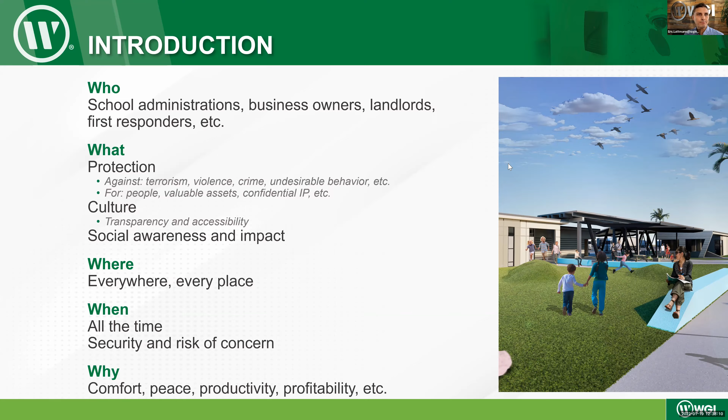CPTED is an abbreviation for crime prevention through environmental design. This is a concept that has been around since the early 70s. It's a multidisciplinary approach. As architects, we are collaborating with all kinds of different engineers, planners, landscape architects, stakeholders, users, and clients, coming together in a cohesive fashion to focus on what design decisions we make to deter criminal behavior and improve the quality of life.

It really belongs with the power of the people. I'll get into active versus passive strategies, but the people in the space are really what drives how a space will respond and react to the use.

And it must be integral. We have to start planning for safety and security well early in the process. This is not something you can add in later and assume the strategies and concepts are going to work as if you had integrated it at the beginning, thinking about it in the initial kickoff meeting, and planning with your users and stakeholders what strategies could be implemented to make for a successful project in the end.

There's this first generation of CPTED, which was derived out of a document created for the US Housing Department by Oscar Newman called Creating Defensible Space. This discussed design strategies for architects, engineers, and planners to identify spaces, look at concerns, and attempt to remediate those through design decisions.

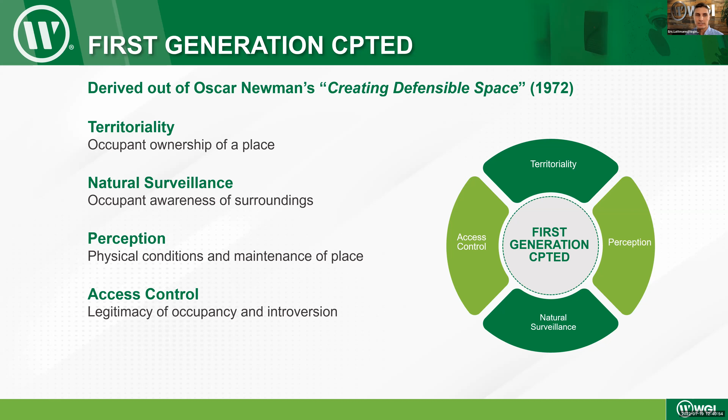When we get into the second generation of CPTED, this starts to talk about social awareness and how we're trying to create solidarity between us socially. We as users or occupants of a facility, whether it's a park, a government building, or a school, are working together and looking to solve localized problems.

This is like a neighborhood watch. We are working as a community, all looking to work together and build camaraderie. The idea of social awareness was an expansion on that awareness—that we can all be aware together and utilize our behaviors to really impact how a place will work.

Diversity is a notion of bringing demographic diversity and capacity of use. For example, in a particular plan for a city, maybe there are lower percentages of alcohol-serving establishments. It's a way to create a balance of types of uses to bring diverse backgrounds and diverse people together, achieving the solidarity that the second generation is looking for.

Connectivity is about always looking to link occupants through transparency and inclusivity. This is the extroverted, preferred way we have developed in our industry of wanting to accept and be open to all of these different ideas and people coming together.

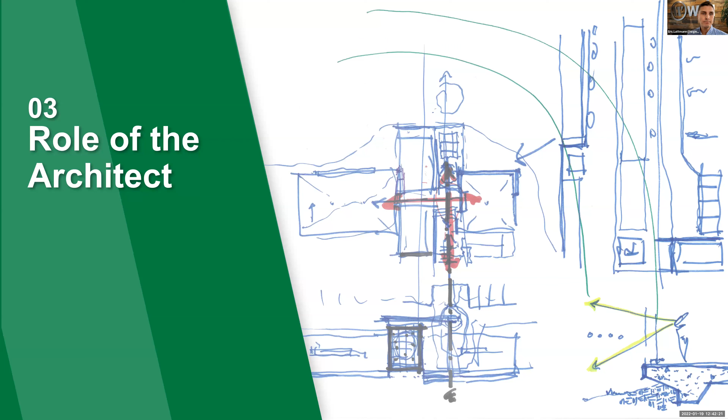What is my role as an architect? I'm trained to be the collaborator—the one managing most design projects, using our resources and engineers and planners to collaborate and harmonize our ideas.

We're looking to think outside the box and creatively about how we implement solutions that are cohesive. Not every problem is complex, but we do work on complex problems a lot. What we do is provide solutions to those problems, and safety and security is one of those integral solutions.

As we look at full holistic designs, we're talking about everything from engineered systems through safety and security and even into aesthetics. The idea is that we balance all of this in a way where a project feels, looks, acts, and is comfortable for occupants and users. A lot of things we don't necessarily want to see, like safety and security, can be balanced and almost disguised so it blends and fits with the facility and does not appear as if you're walking into a fortress.

The integrated design process is not a concept that I've derived. It is something I use as a basis for how I work. It's an idea of bringing all these ideas together and providing a cohesive solution. We must bring balance—that balance is of all those items I listed beforehand, and even more.

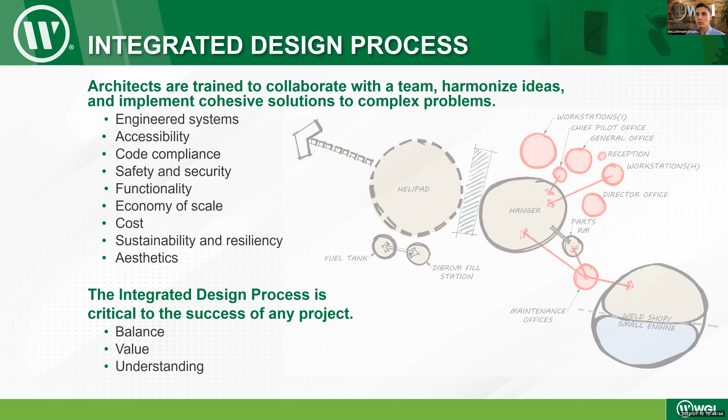We have to understand what the goals are. That's why as architects, we strive to meet with our client regularly, have charrette sessions where we can look at the design holistically and even utilize everyone's ideas in the final solution, understanding what kind of people and place we are designing for that particular solution.

Safety and security is not an afterthought by any stretch of the imagination. As an architect, as defined by the Florida Department of Business and Professional Regulation and nationally through the AIA, I have a general responsibility—I'm looking at the profession with the general health, safety, and welfare of the public for which I'm designing these projects. So it's already inherent to what I do on a daily basis.

But this is something not a lot of people think of at the beginning of a project, because a lot of times it's more or less just adding cameras or access control key cards or bollards, something to protect the facility as just a general requirement, and not thinking about it holistically.

What I wanted to get out of this is that this takes place at the charrette, the design kickoff, at the very beginning. Then we go through the process of anything from hand sketching to creating models to the final built solution. It's always there in the forefront as a thought, and it's implemented appropriately that way.

So I've provided a couple of links. I think it would be beneficial for anybody that has an interest in safety and security. This website can expand into many other areas, but these are a couple of specific links that I think would be integral to what we are talking about today.

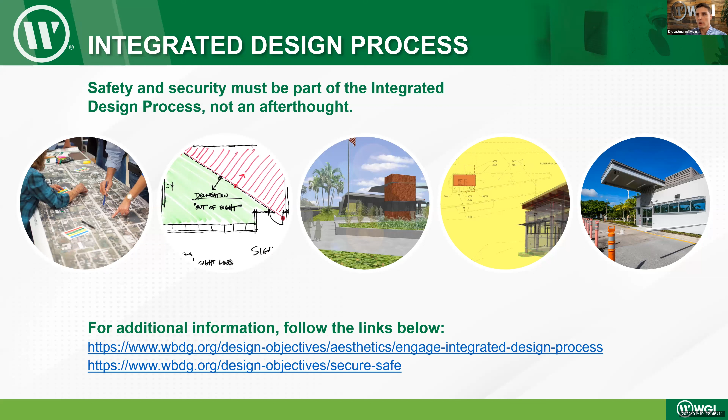As I mentioned, it's not one size fits all. You can't just apply cameras and access cards to every project and assume you're implementing safety and security strategies, because that's not the case.

I've taken on this as a passion, and I've written a couple of blog posts and white papers about this. Happy to be presenting in this kind of format, because I do think it is an important part of the puzzle—something that must be integrated early. We know that not every project will have the same level of this implemented into it, so what we can do is also a threat and risk analysis.

Should it be an existing project or an existing facility that needs to be reviewed for areas of concern where you could have a little more security for your particular facility, and understanding how the goals of that project work with that analysis.

And this is for both new and existing projects. So every single project, doesn't matter if we're designing a lobby renovation implementing security upgrades, or a brand new school building designing it from the ground up, as a design team we all need to be on the same page and think collaboratively.

We know that it's iterative, which means we will be constantly tweaking and collaborating, not just internally within our design team as a silo, but with the users and the client, any stakeholder that would have an invested interest in that particular project. We'd want them included, and we need to be approachable.

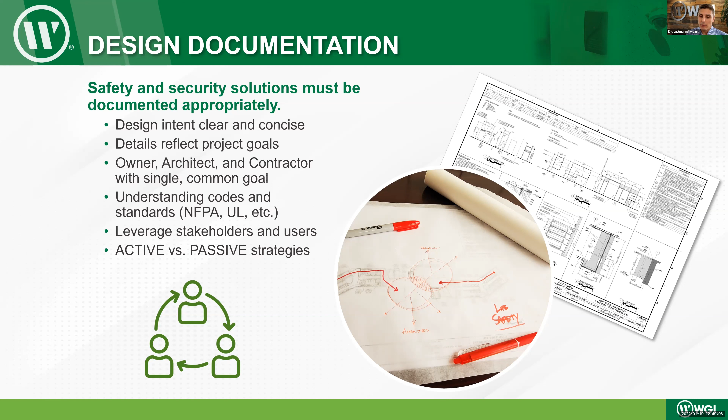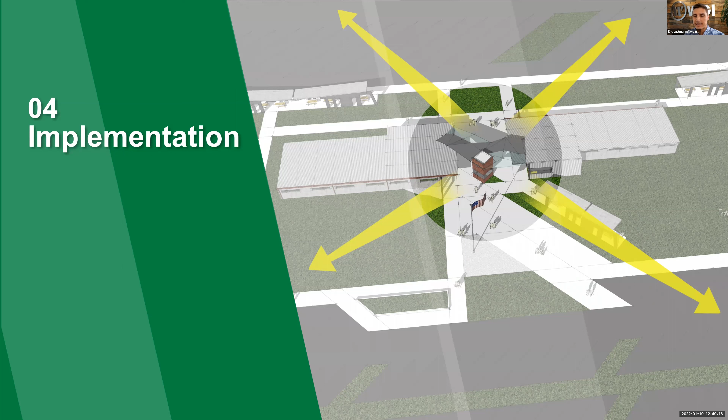We need to leverage the stakeholders - I keep repeating that we need to all work together as a team. Now I'll start to get into some of the meat of what we're talking about. So implementing these, I'm going to talk about passive strategies more, but I'll relay a little bit of what these active strategies are after we get into what they mean to me.

Thoughtful architectural design results in places that are safe, and it's also a balance where we're balancing aesthetics and comfort. There are many strategies we can look at that will take this into account.

There's active strategies that a lot of times are outwardly identifiable. This is often to warn off unwanted behavior - it's the bollards that protect the sidewalk from the cars, the cameras that protect the building which are pretty obvious a lot of times, and the key card swipes at the doors where you obviously can't get in unless you have access that's been granted. A lot of times these cost money to the project, which at times is okay, but a lot of times you don't necessarily need this based on the use.

It just happens that a lot of the work I do is government work, and most of the time these are being implemented to protect necessary information or people inside. So this is absolutely necessary, and it enhances protection upon what we would typically design as a passive solution in the design.

Some of the passive strategies are obviously going to be inconspicuous - means of designing floor plans, making them more efficient, clear sight lines, things you wouldn't necessarily see or observe, but you would understand in your natural awareness of that space. We look to effectively balance these - that's my goal. Every single design project my team and I work on, we're always looking at this from the occupant's perspective: is the occupant safe?

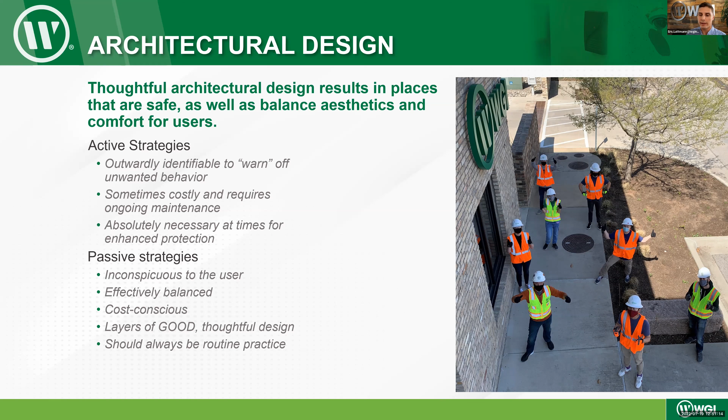So some of these active strategies, I'm sure you've seen these, and they're everywhere, not uncommon by any means. It's access control, intrusion detection. These are alarm systems. Like if you go to a university, you see the blue light call stations. These are there for the protection of people, and they're good to have in these specific cases.

Surveillance, looking at cybersecurity and how we're protecting our nation's information. That is becoming a big deal. And when we're talking about the nation's information, we're also talking about the electric grid and the water and sewer, the infrastructure that we have. How are we protecting that going forward? A lot of times we're using these active strategies to do so.

Fire protection, that's a code-driven item. Lightning protection is in Florida specifically, we do this a lot. This is something that almost every one of our projects will have some form of lightning protection system.

Bullet and blast resistance assemblies, we do this quite a bit on some of our work for the government. This is inconspicuous, but it adds cost to the project. But what it does is protect those inside from any of that unwanted behavior we're talking about.

Structural hardening. This is becoming a big deal in Florida too, as a lot of our older buildings and infrastructure are aging. We're going in and working with our structural engineers and clients on how to utilize your existing buildings or infrastructure and harden them to make them last and become more resilient for the future.

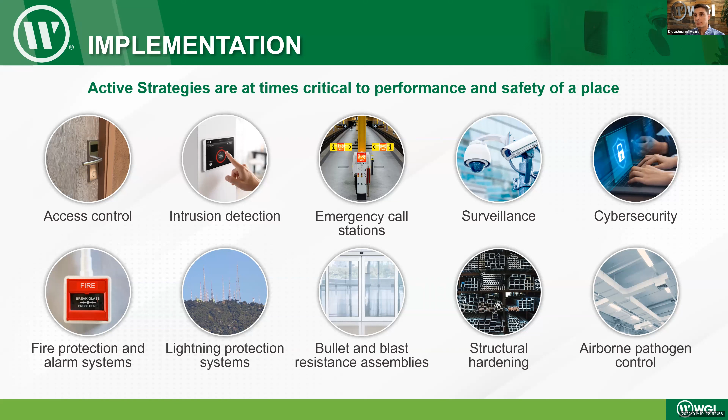And then airborne pathogens. We're in the age of COVID and airborne disease. So working with our mechanical engineers on how we deliver quality products and systems that will keep those safe in hospitals and other places where there's a lot of crowd.

I'm just going to quickly go through an example of the process of how we work, me and my team. This is an example of a government funded project. It's a public project, used 24 hours a day. It is along an interstate.

So we're talking about a lot of people moving in and out of these facilities on a daily basis, both passenger vehicles with families, dogs, and also truck drivers. So the mix of people is pretty diverse in this particular facility. This to me is one of those types of facilities that would be an excellent example of how we work.

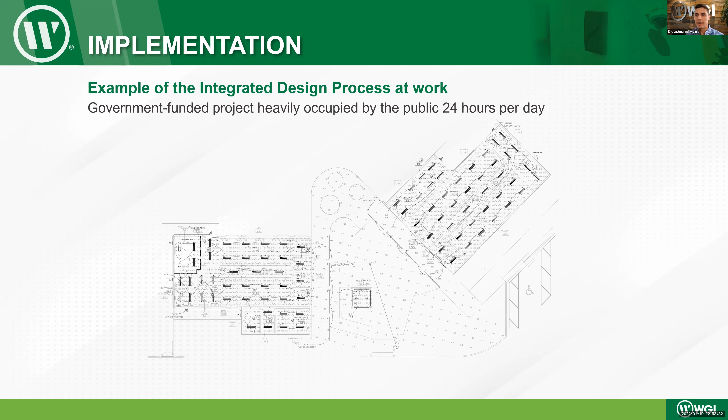Visibility. This is a big one. We're looking to limit how distracted people will be inside enclosed spaces, opening up spaces, maximizing visibility, creating clear sight lines. A lot of people don't think you need to coordinate with landscape architecture about this, because utilizing low ground cover and vegetation so you don't obstruct views is important when you're talking about public facilities and many different types of people moving in and out.

So this also has to do with creating barrier and allowing for that transparency to come through. A lot of times with schools, you're going to completely isolate students from the outside. When the bell rings, those doors are locked. But there's ways to do that where you can still make the building or facility feel open and inviting without making it feel like a prison.

There's been this old adage that when you design a prison and when you design a school facility, you're almost designing the same building, you're just doing one for kids. So we don't want it to be that way. We want the buildings to all feel comfortable and utilize what we do best, how we can consult and make good decisions for clients, so that buildings feel as if how they should feel.

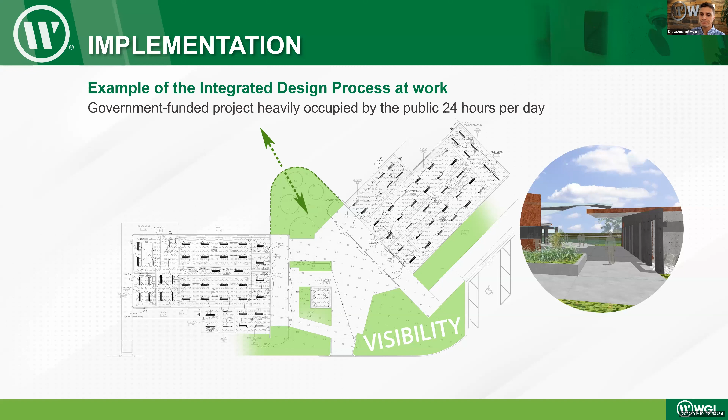Natural awareness is one of those CPTED concepts — just having the ability to be in an open public space that's busy and has others around, people you can connect with and work with, live with on a daily basis, so that everyone can almost self-police the entire community together. This idea of awareness of the facility really depends on the architect and design team making good decisions for efficient buildings and spaces. When creating parks and other facilities, we need to think about how you're entering versus how you're using it, and where the playground is located, to keep occupants safe and aware of their surroundings.

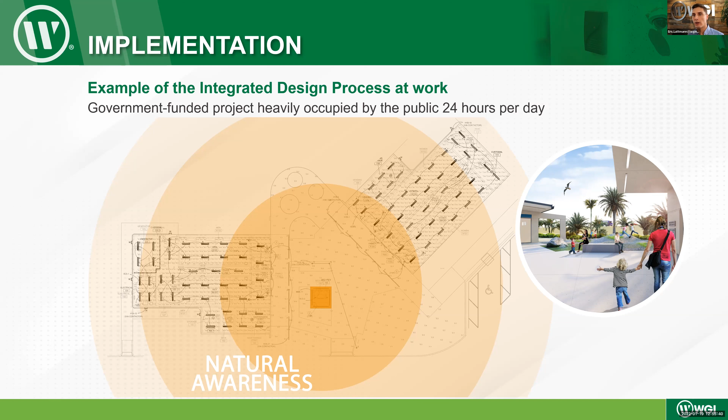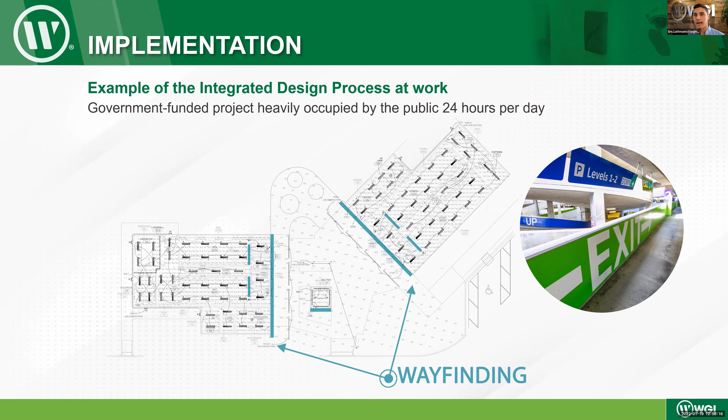Wayfinding is a common tool we use, particularly in parking garages, parks, and government buildings — utilizing wayfinding not just for people entering the facility or those who understand what it is, but inside the facility, making sure spaces are not confusing. The last thing we want is to develop a puzzle that requires signs at every corner to tell you how to get out. Wayfinding is a strategy we use to supplement efficient floor plans and designs to help with exiting and entrance capabilities.

Access — we need to provide access to first responders, making sure entrances and the ability to access these spaces is available. Fires, anything that happens, we need to provide equal and quick access if an event occurs. This also applies from the inside out, so people in an event need an efficient way to escape the building or place. To me, this is one of the critical items that isn't necessarily observable. When a project is complete, most people won't understand the work that went into a design solution, but this is of critical importance to a designer and architect, making sure the place is easily accessible both in and out.

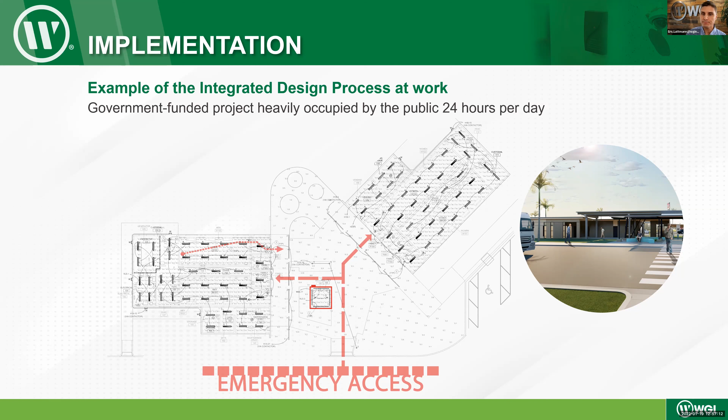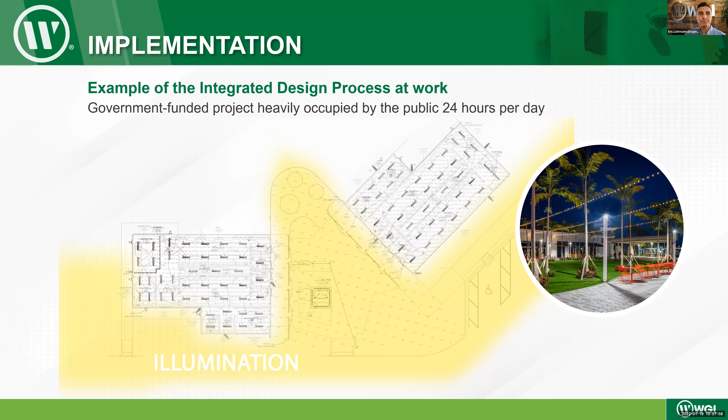Illumination is another passive strategy. Lighting is obvious — we're going to light our spaces, but lighting them appropriately and efficiently so there are no dark spots. We want all public areas illuminated, but we also don't want to over-illuminate to where it feels uninviting; we want inviting spaces. This is one of the spaces our team has designed, a beautiful outdoor space among buildings that gets used every day of the week and is packed every weekend. So we're creating these spaces through these strategies to implement good solutions while keeping them from distracting from the use or function of the space.

A couple of related concepts tie into safety and security, and I want to talk about WELL. WELL is a new idea that stemmed off of LEED. For anyone not familiar, LEED is Leadership in Energy and Environmental Design, a concept about sustainability and resiliency. WELL takes that a step further, focusing on occupant health and the people using the facility to its fullest — not just the building performing on its own, but how it performs for its people, users, and occupants every day. There are hundreds and thousands of things that can be applied, and you're essentially applying for a certification. Not applying for certification is still okay, but many of these concepts apply to every design. There are seven concepts crucial to this: providing clean air, clean water, nourishment, light, fitness, comfort, and mind.

All of these, to me, are daily necessities — you always want to feel as comfortable as you can. By using these seven concepts within a building, it allows designers utilizing this standard to implement strategies that best promote well-being. Architectural design is flexible and adaptable, something we're always looking to evolve. As our world changes and our industry evolves, we need to adapt and reflect that. Places also need to adapt to human behavior, and we need to implement certain strategies. This WELL standard is a great way to design buildings that are flexible, adaptable, and can relate to the masses.

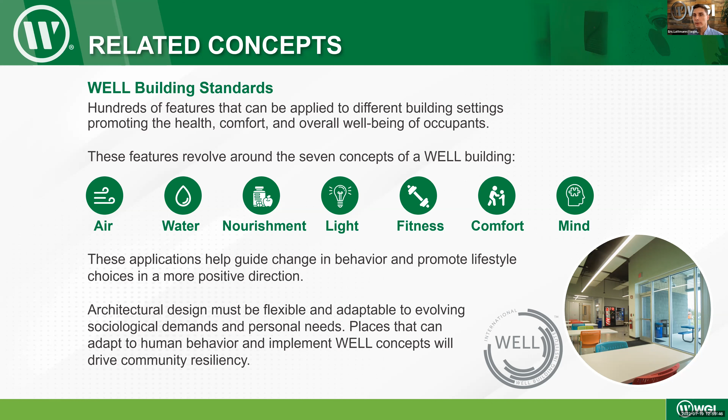Sustainability and resiliency, that's a concept we're all thinking about—everything from water and sewer infrastructure to the electric grid, electric vehicle charging, our climate, and sea level rise. We're always looking at that. In Florida, we see a lot of this from most government agencies we work with, and we're looking to make the world a better place.

We're looking to provide strategies that will keep us safe for the foreseeable future. We're looking to mitigate natural disasters as best as we can—sea level rise, hurricanes, tornadoes, all of that happens. How we design our buildings and harden them really is impactful to the way that we work.

Just a side story—this isn't something to jump for joy about—but I helped design a facility in Charlotte County, Florida, that was one of the only ones still intact and used as an emergency response site for Hurricane Charley when it happened. That's the kind of work we're trying to do, working with clients to develop solutions that utilize that as the goal going forward.

We're future-proofing. When we talk about electric vehicle charging or the power grid, we're future-proofing these facilities as much as we can, looking for that as a concept to protect ourselves and our resources. Longevity is something we're really focused on, and that's where hardening comes in—hardening facilities brings more longevity to facilities that are aging and outdated.

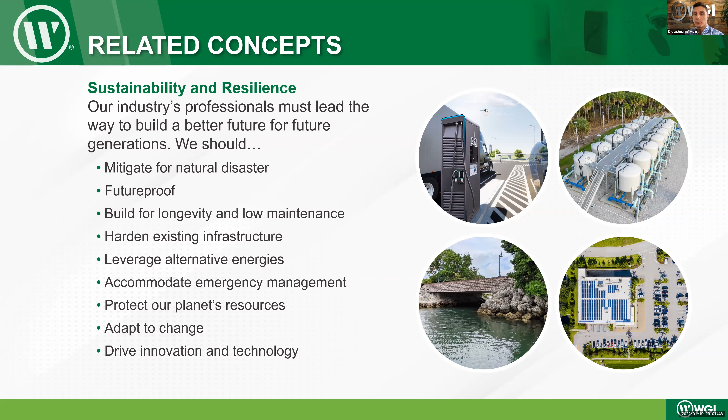We're accommodating first responders. Emergency management is a big one, as we looked at in the passive strategies previous to this slide. Essentially, we're adapting and driving innovation, and we need to think outside the box. If we don't think creatively, we're going to get left behind, and we'll end up with solutions we're not confident are at their best going forward.

Some final thoughts: we need to trust the process. This boils down to the architect, the engineers, stakeholders, and clients. We all need to trust each other that through the process we're going to make the best decisions we can. We're understanding the place and use—looking at the exact specifics of the particular project, utilizing that in our goal to design a safe and effective use of that space.

We're thinking critically. We're never stagnant in our thought process—always researching, thinking about the next thing, utilizing strategies that are time-tested but also looking at how we implement new ones at the same time, and collaborating. We need to maximize our thought by utilizing our peers and stakeholders to make sure we're providing the best solutions.

And balance—I keep talking about balance, but it's one of those things we all need to think about holistically. Through hiring an architect and an engineer, and hopefully WGI, we'll provide that balance that's necessary. A quote from Albert Einstein I thought was interesting: 'Learn from yesterday, live for today, hope for tomorrow. The important thing is not to stop questioning.' So we never want to stop questioning what is there, and we're going to design for the future.

And with that, I appreciate everyone's time, and I can answer some questions, and we'll wrap up the presentation.